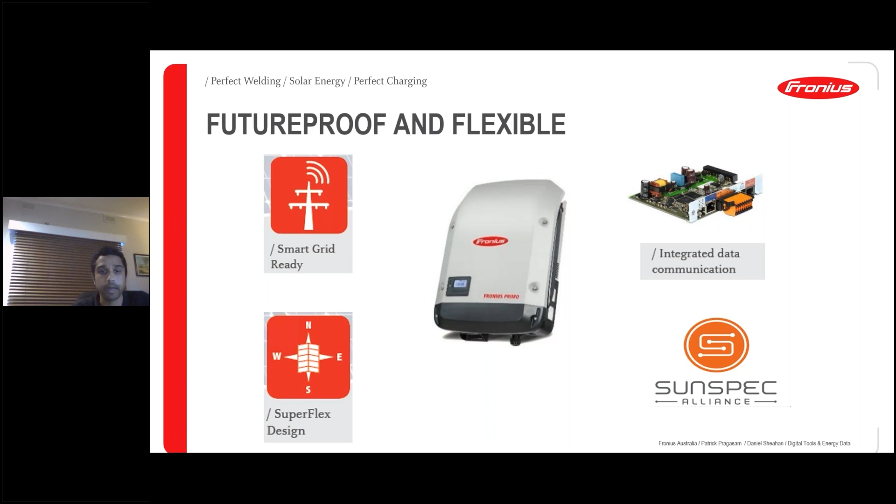So as I said, we have that vision of 24 hours of sun. And in order to accomplish that, we need to be collaborating. So this SunSpec Alliance, and having these open interfaces to make it easy to talk to other devices, that's also quite important. So looking at the data manager card 2, this is built into our inverters. It logs production data. It has various open interfaces to allow communication with other devices. Also, you can have a smart meter attached, which we'll go into in a little bit.

Sometimes people want to extract data to use with their own software. This can be done, for example, through our APIs. It's also able to do export limiting. There's quite a few sites out there that require that, so no need to get anything else. You've got that within this monitoring card. And then it also alerts you if something is amiss. If it's connected to the internet, you can get these alerts as well. All right. So there's a few different things there.

You're also able to do some energy management stuff that we'll touch on a bit later on. So, that leads us on to a question that we get: why monitor at all, right? So there's benefits to the customer if the system is monitored; then they can get more information about their energy profile at their premises. It can inform them about how to manage their energy, how to use their energy in the smartest way possible, right?

But also for installers, it's really important because it means that you can diagnose any problems. If, say, you get a call from a customer, you can see the system online and go through certain details, which we'll cover during this webinar as well. And with certain situations, you can even resolve things without having to go to site. And it's also easier to navigate conversations with certain customers.

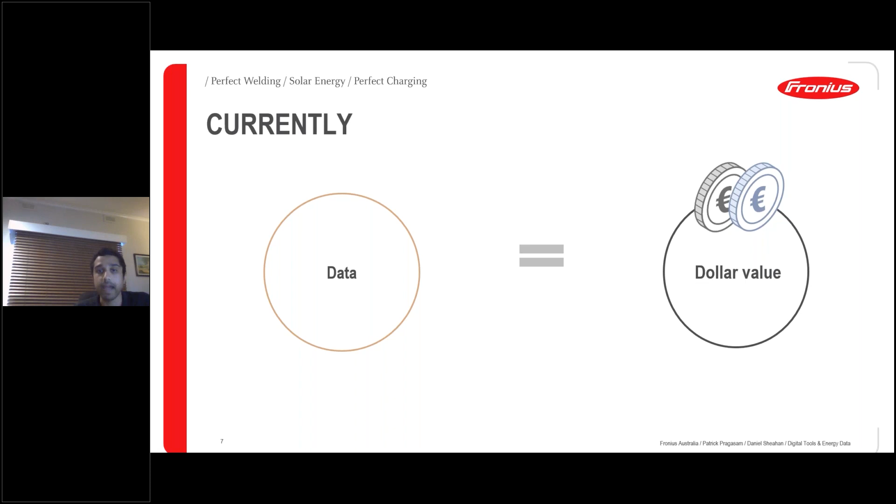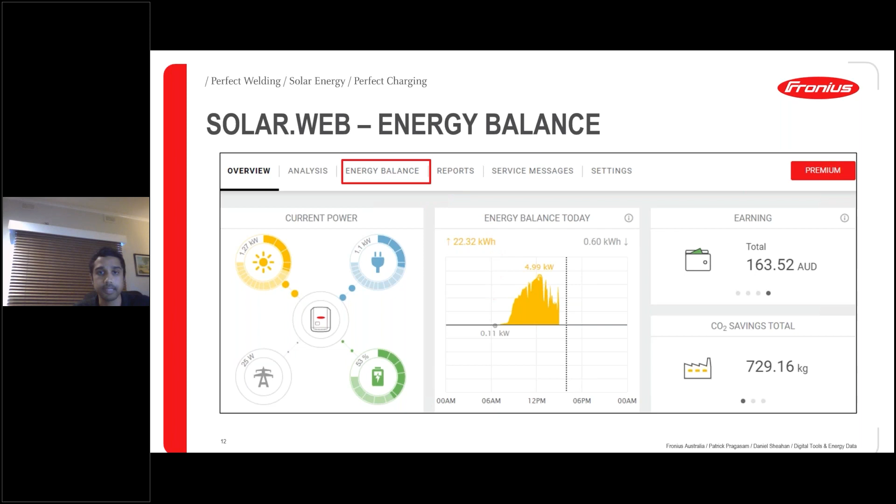Then if you go into the energy balance tab, so you can either click here or you can click on this graph as well, it'll take you in. And you'll get to this page here. So there's two different ways of viewing the data, right? Production and consumption. So I'll come to that in a second.

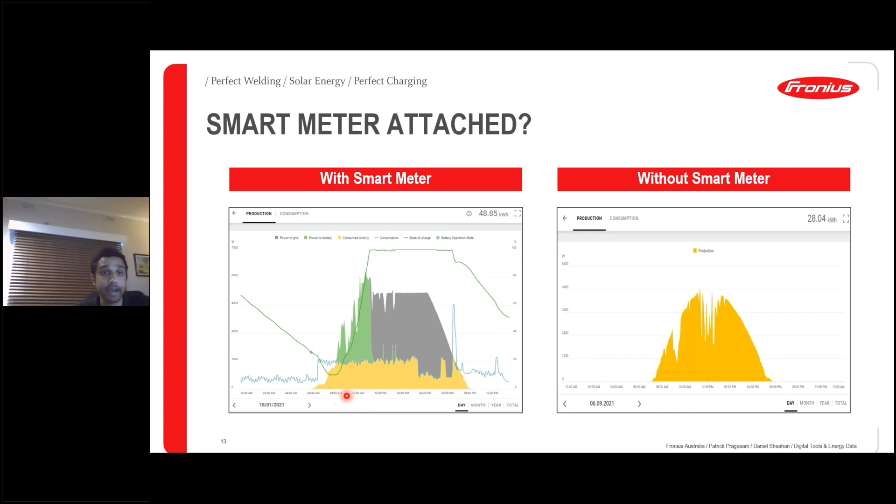But here, the difference that you can see right now with a smart meter versus without a smart meter, right? So without a smart meter, you can just see what's being produced. But with a smart meter, there's a lot more data that you can get. So you'll be getting 5-minute incremental data in the daily view. You also have monthly and yearly and total. But in the daily view, it'll look something like this, and you can get 5-minute incremental data, right?

So as I said, you've got the production view here, consumption view here. It's just two different ways of viewing the data. So you can see over here, power to grid is shaded in gray, power going to the battery in green. Your consumption is that blue line, and whatever is shaded yellow is what you're consuming directly from your solar system. So here, for example, this yellow bit is being taken from the solar system. The rest would be taken from the grid, for example. So quite a bit of data that you can see there. So that's the daily view.

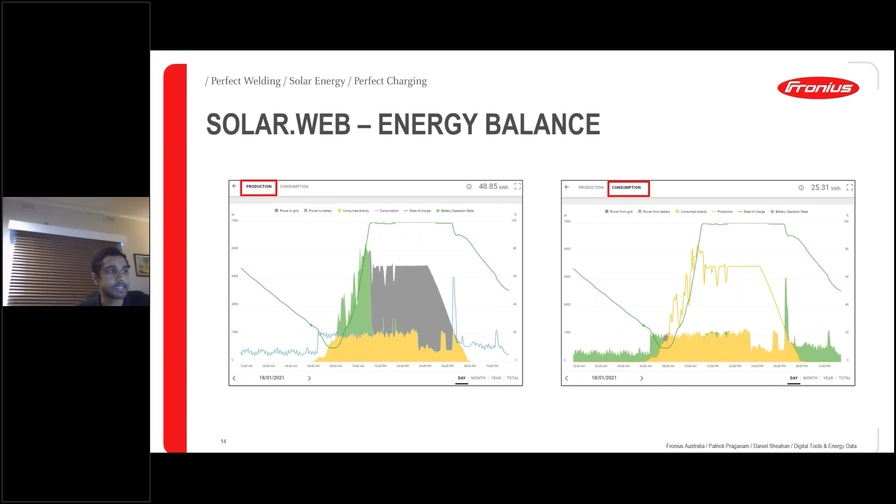And then you can also have the monthly view. So you get daily totals for each day. So you can see there energy to grid, energy to battery, and consumed directly, for example. So you're getting those totals for each day. And then if you click on the yearly view, you'll get totals for each month. So that's another way to visualize it. And then you can also click on the total tab here, which would give you totals for each year, if you want to see that.

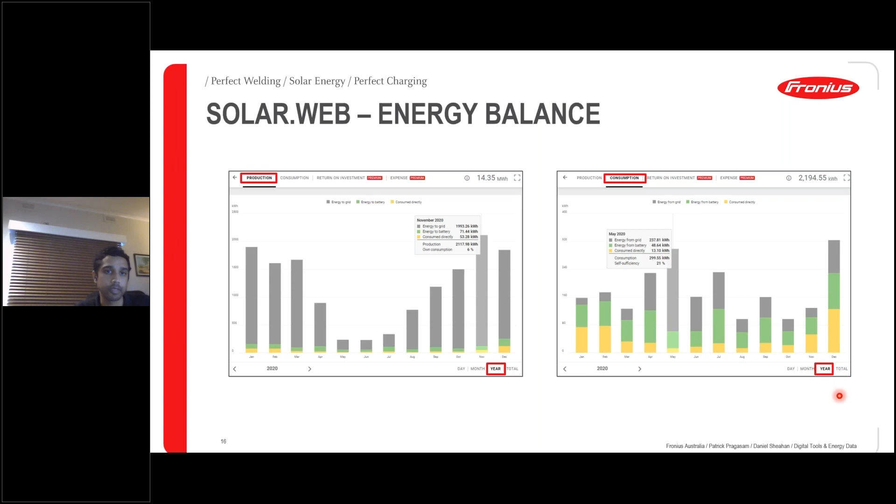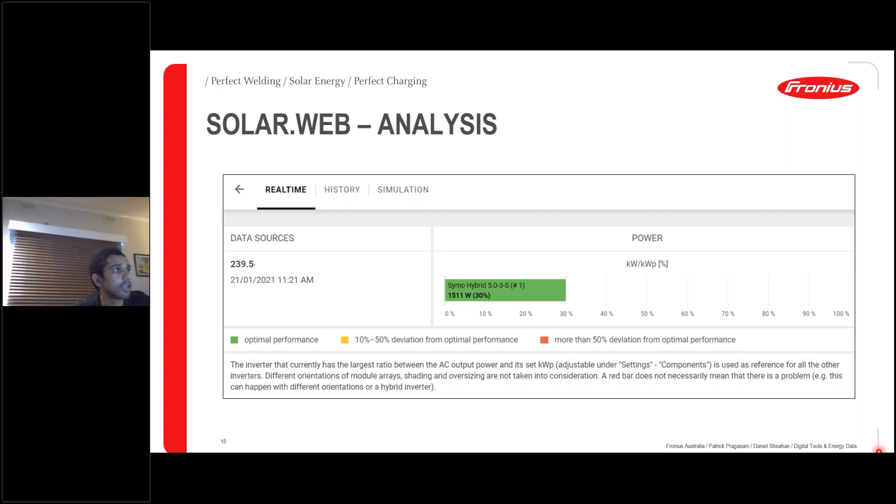Another way you can visualize data is to go into the analysis tab. So if you click up here, even more data can be viewed. So it'll take you through to this real-time tab. You can see how much your inverter is producing in real time, and what its performance is. And then if you click on history up the top here, you can choose your device. So you can either choose the meter, if you had a meter there, or you can choose your inverter. So I've chosen the inverter. And then you can select different parameters that you want to look at. So here we've got the current and voltage on the first phase there.

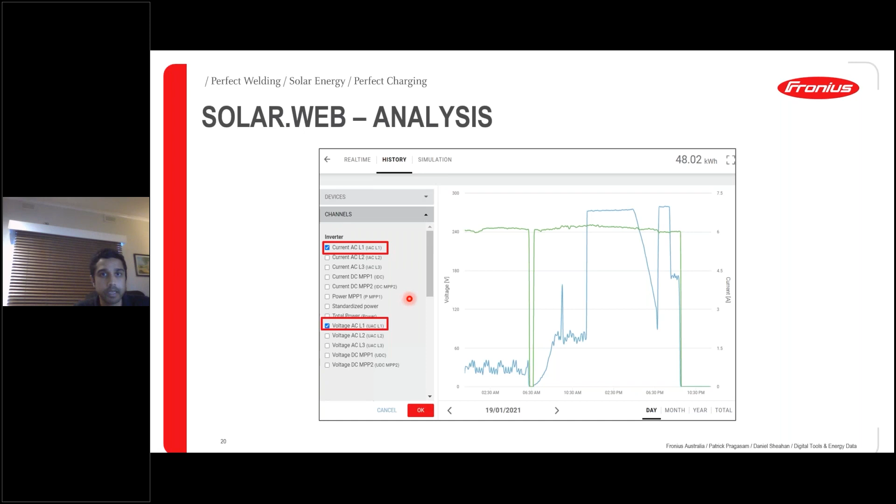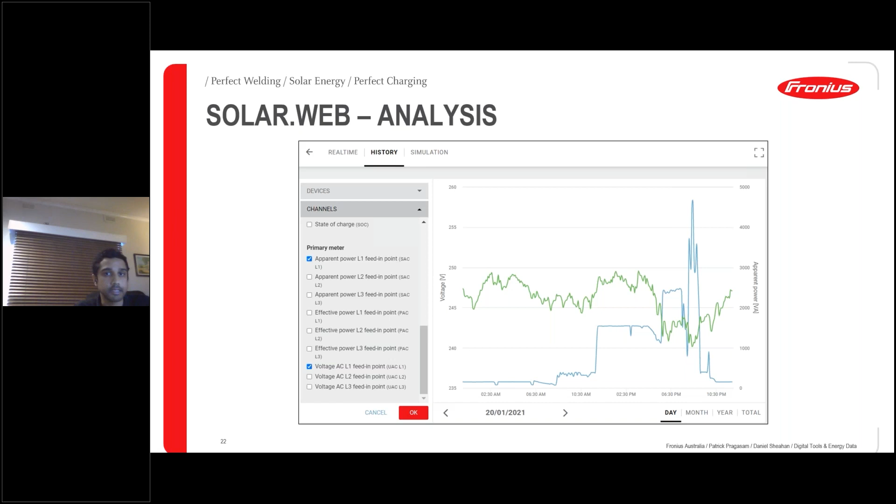And then if you also wanted to, you can look at things on the meter side. So you can select that and look at various data that the meter is seeing, okay? So quite a bit of data that you can visualize between the analysis and the energy balance sections within Solar.web. And another thing you can do is you can also extract this data into a report, if you need to do some further analysis on it. Or some installers will have to do certain reports for their clients, etc.

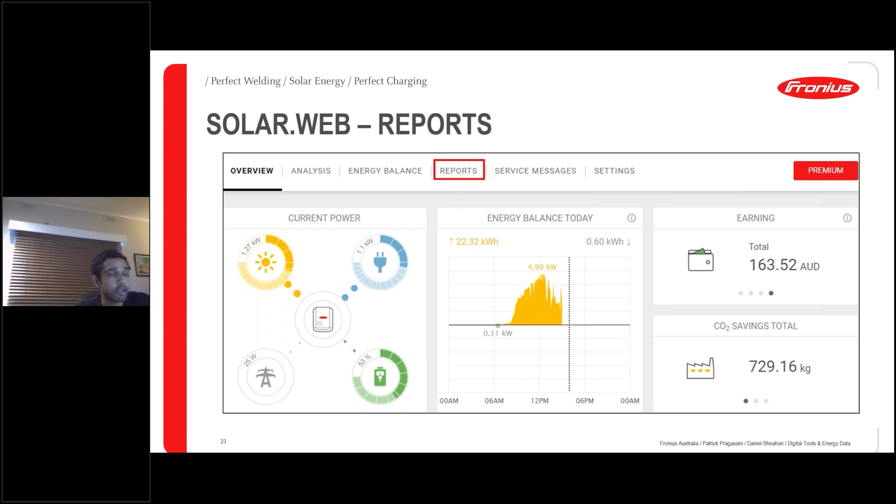So you can do this by clicking on reports, create a new report. And then if you don't have a smart meter, you wouldn't have that energy balance option. You could only do a report in PV production. And then you can also do some custom reports as well, where you can get a lot more parameters. So PV production is what's being produced. Energy balance will show you things like what you're consuming, what you're producing, etc. And then custom reports, you can have a variety of different parameters there. All right, so there's quite a lot of data that you can extract, and you can use this data to troubleshoot certain aspects when you're talking to customers.

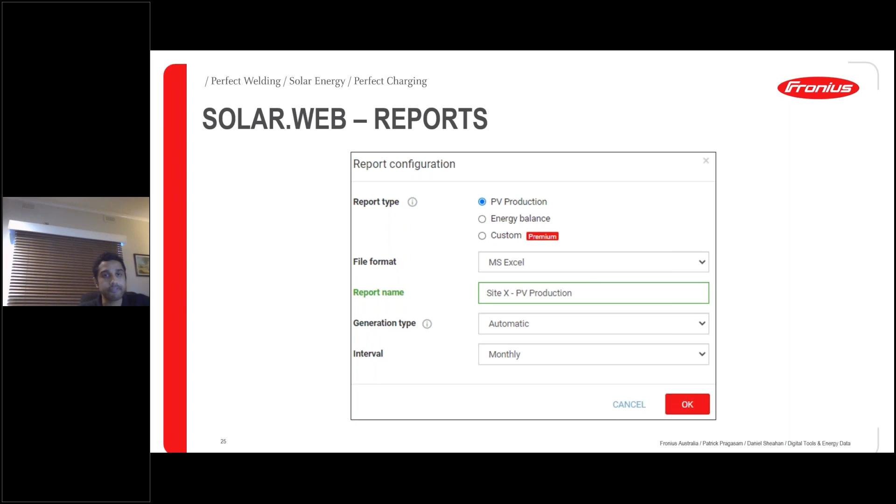But there's also different ways that you can use Solar.web to assess system health. So, is the system performing the way you expected? I alluded to the conversation at the start with the customer saying the bills aren't going down, etc. So seeing exactly what they're consuming and when they're doing it makes it easier to see if there's actually an issue. But there's also these other tools as well. So if you go into service messages right here, there's a log of all the service messages, state codes that appear on the inverter that you can look at.

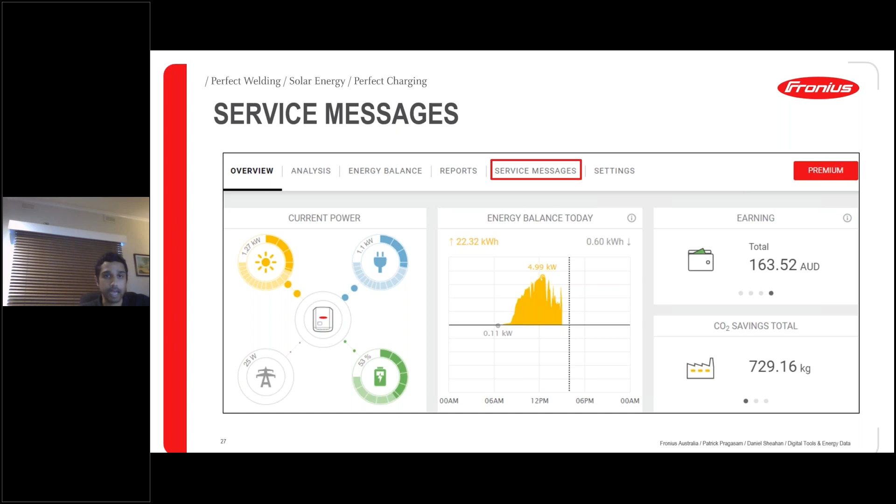So if you click on service messages, you can set a date range up there, and then you can see any service messages that have been received for that particular system, right?

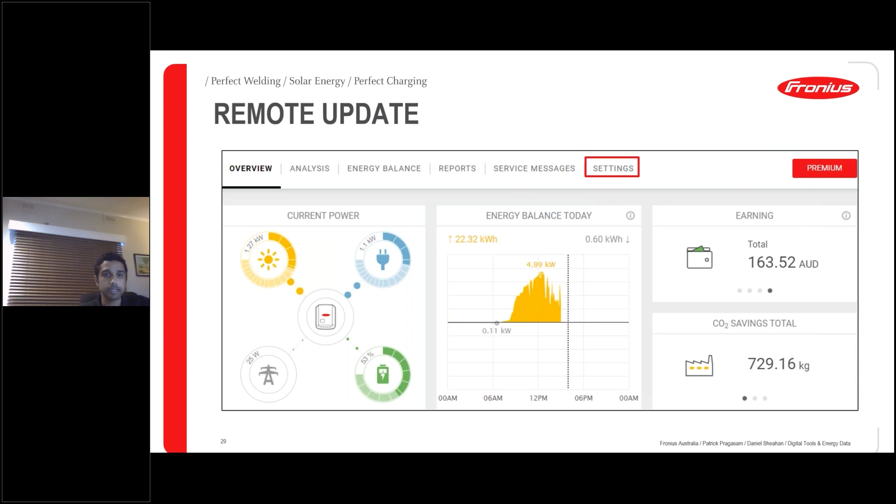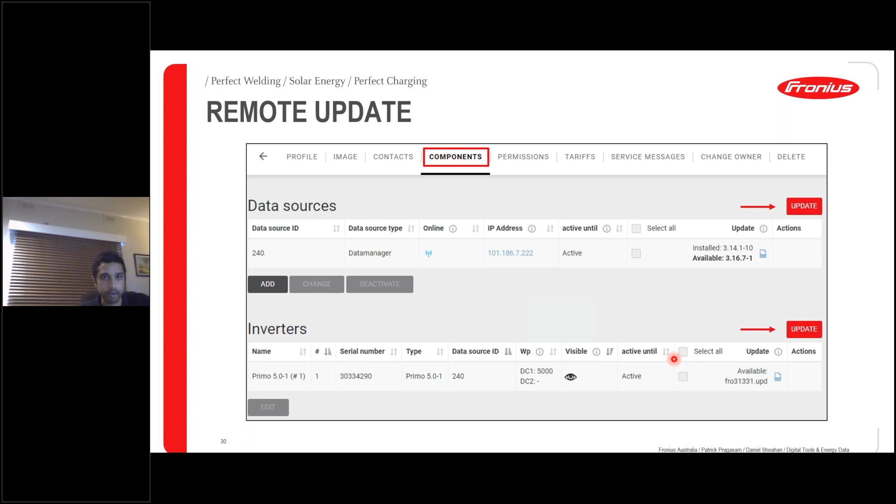Then you can also do remote updates. So if you go into settings, up the top there, and then go into components, you can see that you can update either the data manager card software, or you can also update the firmware on the inverter as well, right? So a lot of issues can be fixed this way, and it's something that can be done remotely, without having to go to site.

Then lastly, going back to that analysis tab, right? So in the history view, I told you before how you can get up various information for your inverter, also the smart meter as well. And this can also be used to troubleshoot and diagnose some problems there, right?

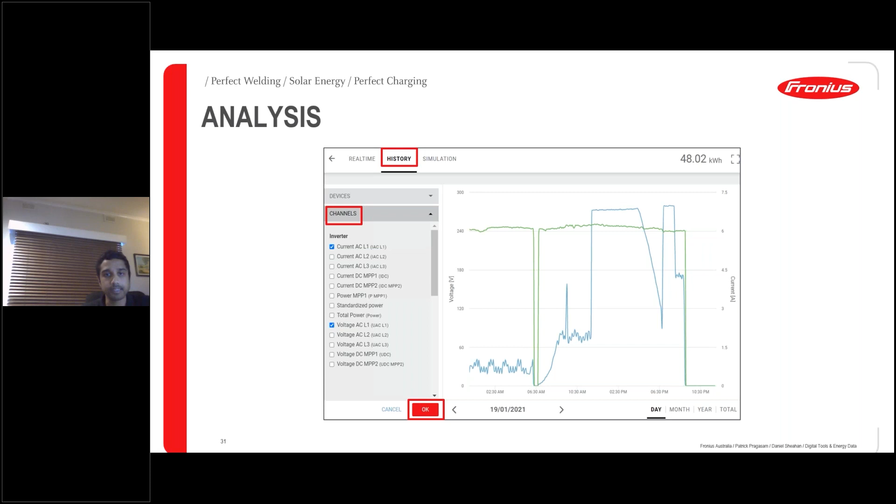There's certain examples like, if the inverter, say for example, was derating, you might go to site and then you might see that the AC voltage there was the cause of the issue, right? Or maybe the site was not producing enough, and then you can check the DC parameters, and in one case there was no DC current. So things like this, it can help with that preliminary troubleshooting and pinpointing towards possible causes of what's going on, right?

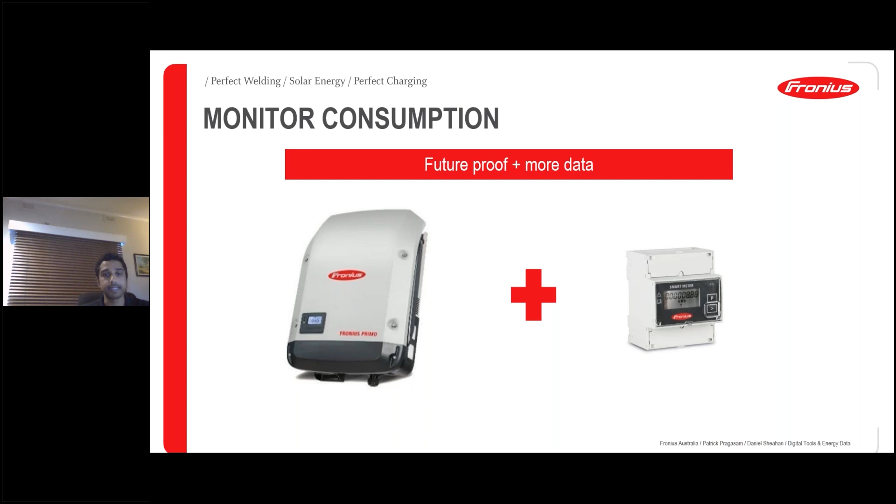So you have all this data that's available with Solar.web, right? And what that data can be useful for is future-proofing the system. So I was talking about data having this dollar value, and this relates to how the data can be used to future-proof a system. So as I was saying before, if you have a smart meter, then you're going to get more data, and with that additional data, you're better off for future-proofing the system, right?

So we always encourage customers to install a smart meter so that they can analyze their electrical consumption, so that they can be smart with their energy. With the smart meter attached, you get more in-depth information. Are they using a lot of power from the grid? When are they using their power, etc.? And when you have more knowledge about the system, you can define loads. And the advantage there is that you can start to do energy management. So you can divert excess power, say, for example, to a pool pump, things like that.

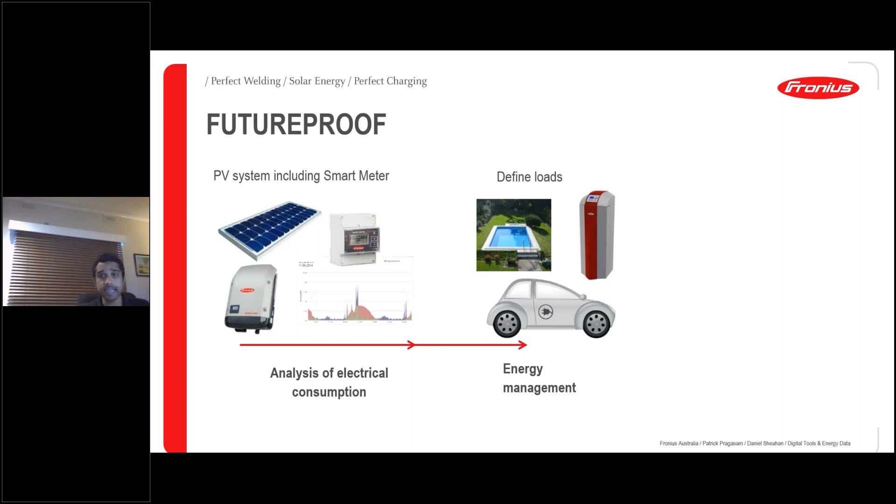And then if necessary, you can also store surplus energy if you think that that's the best way to go about it, right? So with the energy management function, customers can make decisions on the best way to manage their energy and whether they possibly need to expand their system. If they're thinking of getting an EV, for example, with this information, they can also do it efficiently in terms of charging, discharging, etc., and making the most out of their system. And then if they have to look at storage, this will better inform them as to how they go about that. We'll touch on that later on, right?

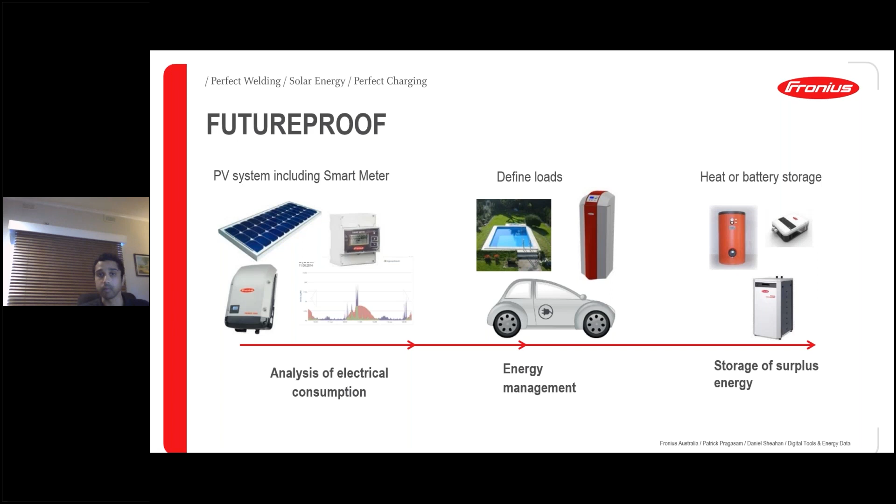So the more data that you have, the higher the dollar value, right? You can learn a lot about the system from having this data. You can also monitor individual loads if necessary with multiple smart meters to get a very detailed picture. When is this load kicking in? When are they using that load most of the time? But you can also get a lot of information just from one smart meter, to see what the overall load is on the site, right?

And it's important in the future when you think about getting a battery, for example, if that's really the step that you need to take at that point in time, right? So Dan will cover that a bit later on.

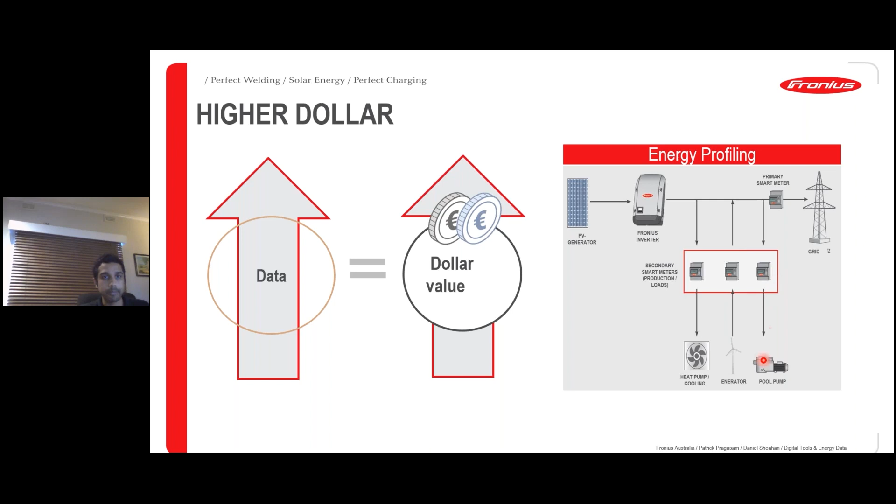So here you can see once you've got, sorry, my pointer wasn't working. Sorry, it's just jumped across.

Okay, so here you can see when you've got a smart meter attached, you can start to do things like optimizing the system with energy management and getting the customer to make the most of what they have, right? So you can go back to the customer and say, hey, I can see that you're using a lot of power at this point of the day consistently. Do you know what's turning on? It might be a pool pump or a hot water system.

And then, depending on the circumstances, you can upgrade the system by installing a contactor, which can be used to control the load, switch it on or off using our free energy management software, right?

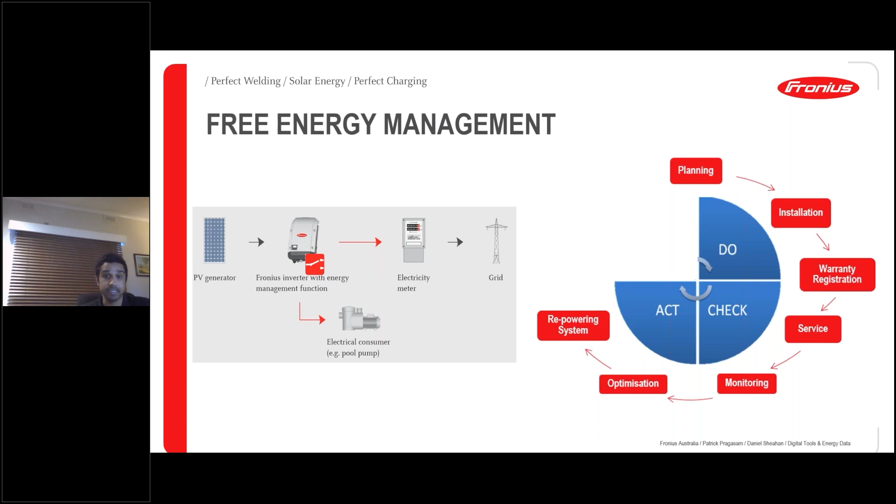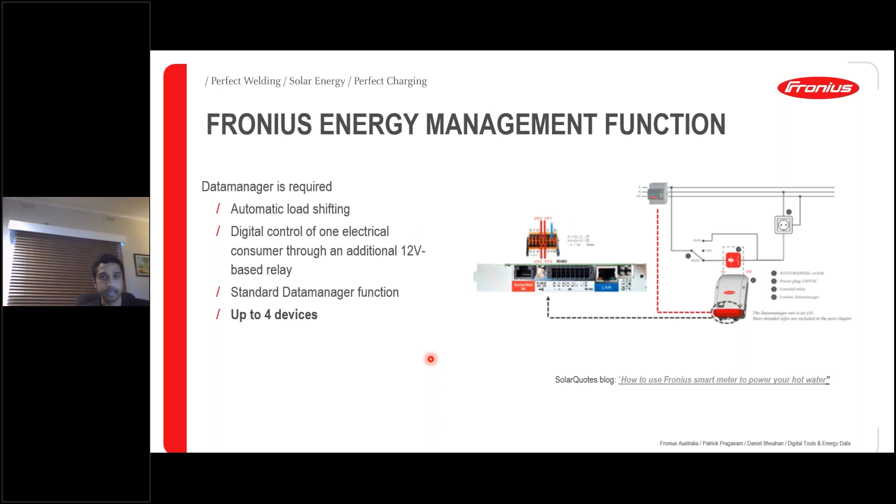So how do we go about that? If you have, say, a smart meter, it can tell you how much power you are exporting to the grid, how much excess power you have. And then you can control up to 4 devices or 4 different loads via 4 different contactors. These can switch on or off depending on what parameters you set. It's just a 12-volt signal that gets sent to turn them on or off.

The thing here is to make the most of what you have, increase that self-consumption. Some installers will already know, from the conversations they've had with the customer, how they're using their power. So they might set 1 or 2 of these contactors up when they install the system to divert that excess power. But otherwise, you can monitor the system for a bit and then come back to that customer.

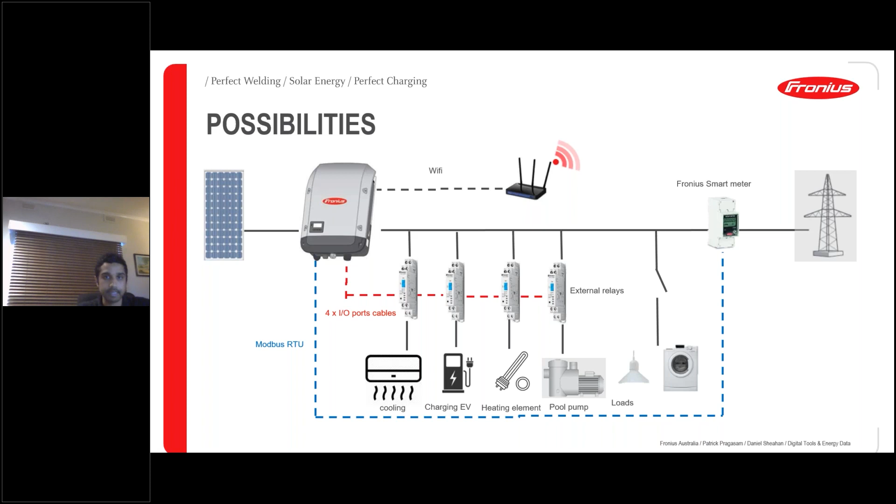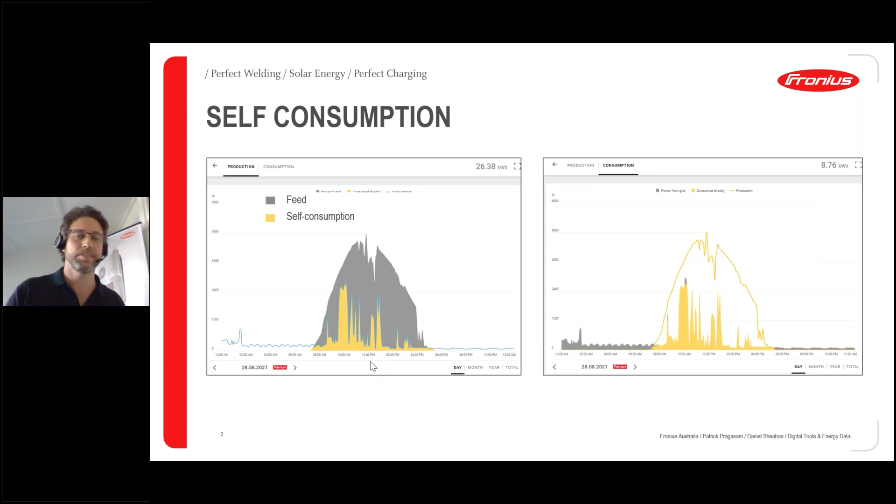So just to cover a bit more on self-consumption, I'll just show another of those slides that Pat had from Solar.web. This is the example of where you're looking at your consumption during the day. And the difference with self-sufficiency is when you start to look at your nighttime usage. A lot of customers, when they see that during the day they've got a lot of excess PV power, want to be able to utilize this as well, rather than just send it back to the grid.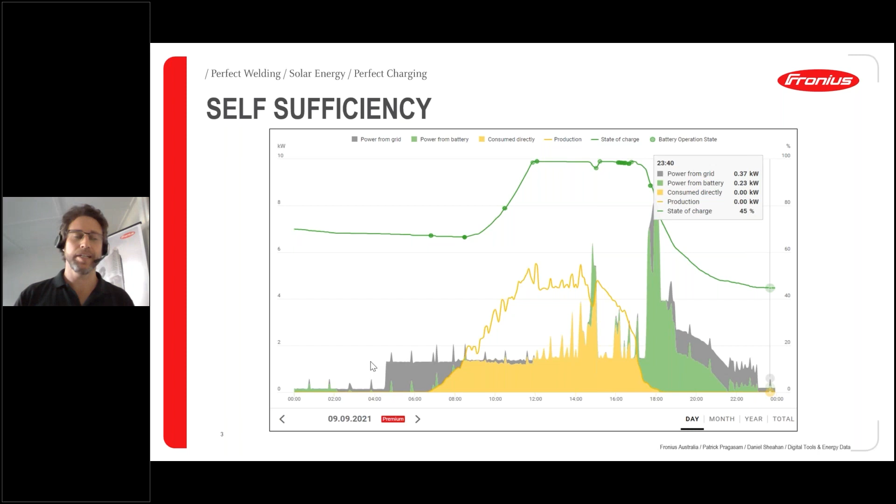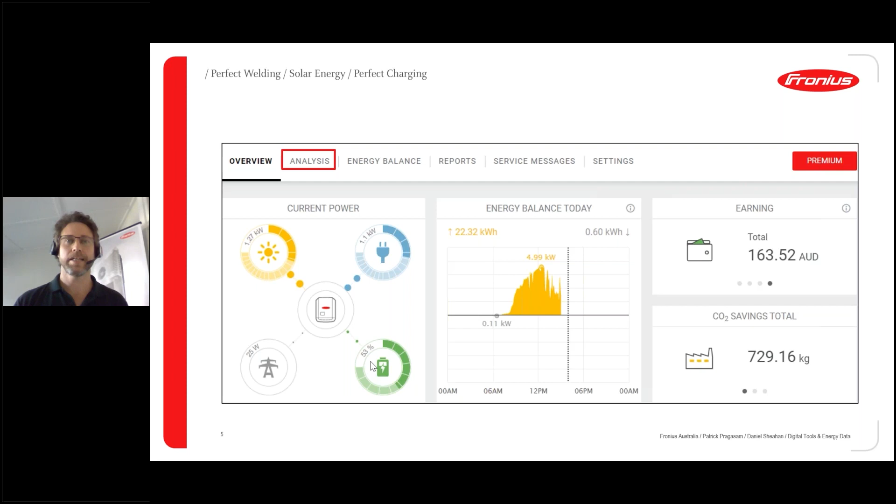So that's when, obviously, it's a big topic, batteries and energy storage. How do we utilize this, and what's the best way to do it? Customers will want to know what's the best size battery for them. Another great tool we've got in Solar.web is the simulation tool. You simply click on the analysis tab within Solar.web, and that'll take you through to a page where you'll see the simulation tab on the right hand side. If you click on this, then you're in the simulation tool.

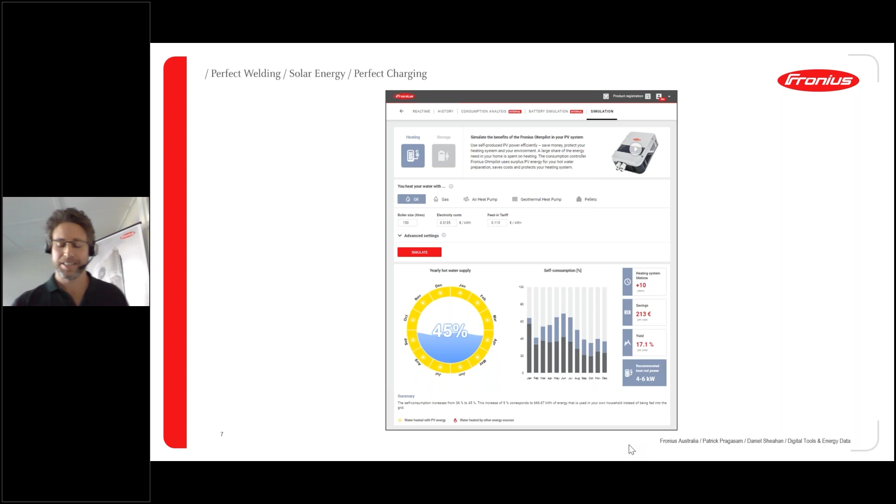In the simulation tool, this will enable you to select heating or storage. The heating section is there just for the Fronius Ohmpilot. It shows you what you can get out of just adding the Ohmpilot and using that for your excess PV power during the day. But most people are interested in the storage function. If you click on storage in the Simulate tool, it then takes you to this page.

On the left there, you've got the self-sufficiency graphs. When you select a battery and click on Simulate, this does a calculation based on the customer's PV production and also their consumption. So you do need a smart meter to be able to use this function. For any of your customers who have had a Fronius system with a smart meter installed for a while, you'll be able to utilize this Simulate tool with them.

All you simply do is click on a battery, and this has all the different BYD battery types that are compatible with the Fronius Gen24s. Once you select a battery and hit the Simulate button, it does the calculation in the background and tells you the self-sufficiency rate.

And this will enable you to propose to your customer the best size system that they need for their battery. The screen on the right is exactly the same as the one on the left. It's the same battery, the BYD 6.4 kilowatt hour battery, but what they've selected there is the backup mode option. This is leaving some reserve in the energy storage in the event of a grid failure. So if you have a blackout, you have that reserve power there left in the battery.

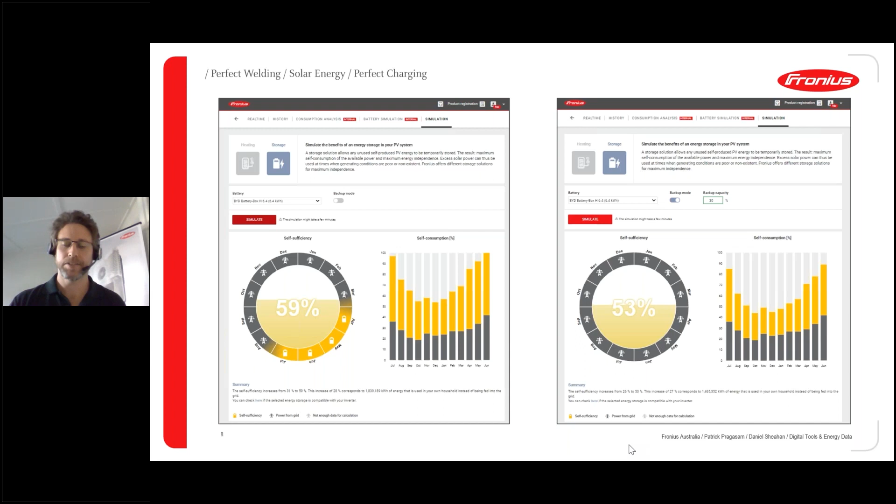What this will do is make sure that they've got some power when the grid goes down, but it does reduce the self-sufficiency rate a little bit, because obviously you're not able to use that battery storage as it's kept in reserve. But you might think that by just clicking on the biggest battery, this is going to give you the best self-sufficiency rate. Well, that's not necessarily true.

As you can quickly figure out, if you don't have enough solar PV, you're not going to be able to charge that battery. So by selecting different battery types in the Simulate tool and trying a few different types, you'll see that self-sufficiency rate change, and you'll get to the point where you keep selecting bigger batteries, but the rate doesn't increase. This is because you've hit the limit of where their PV power is able to charge that battery.

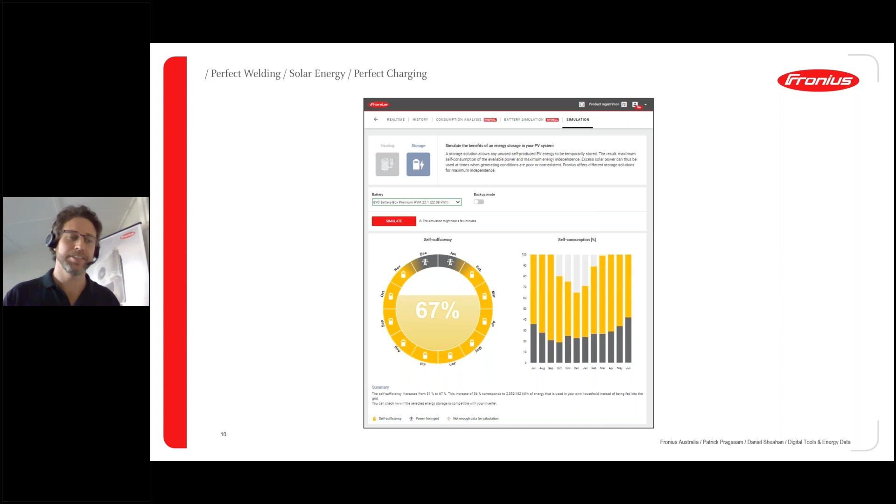So when you get to this stage, you've got two options: you can either recommend they stay with the smaller battery size, or it also might give you an opportunity for some repeat business to tell the customer that they need some more solar power if they want to increase that self-sufficiency rate even more and be even more independent from the grid.

So once you've had this conversation with your customer and you've put the proposals to them, then you can start talking about Fronius's Gen 24 product, which is our great hybrid battery storage unit. A lot of you have probably all seen this inverter. It's been around for a little while. This is now the new flagship hybrid battery energy storage product. It's the all-in-one unit from Fronius.

So I was just going to go through some of the info and specs on the Gen 24 for those of you who might be a bit new to it, as this is the flagship product for Fronius for energy storage. All right, so we've stuck with the names in the Gen 24 unit of Symo and Primo, with Symo being the three-phase unit and PRIMO being the single-phase unit.

In the Symo range, the 6 to 10 kilowatt models are going to be the most popular in the three-phase range. And in the PRIMOs, at the moment, we've got the 3 to 6 kilowatt models. All Gen 24 Plus units are compatible with BYD batteries, so there's the HVS range and the HVM range for BYD.

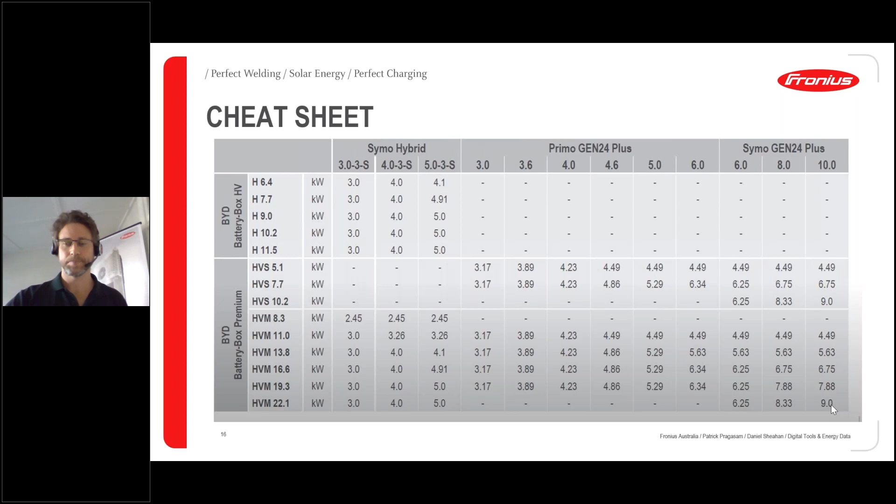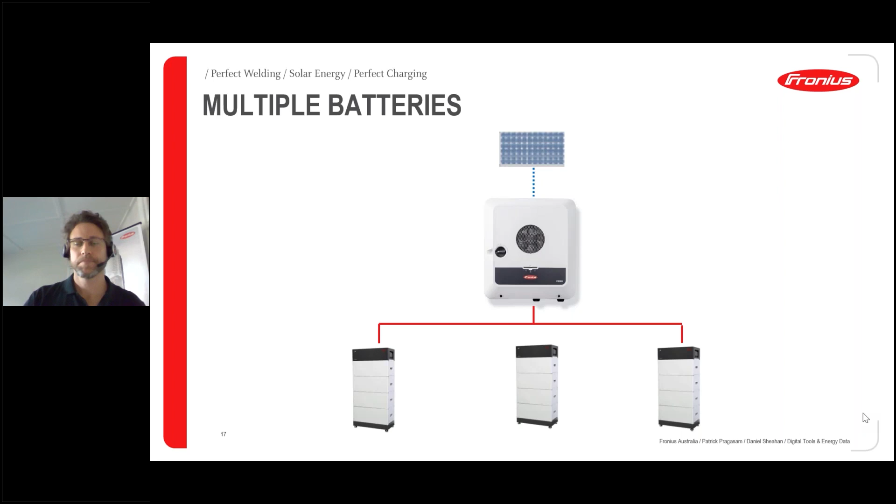Yeah, and as I mentioned, you're able to actually put 3 stacks of the BYD batteries onto one Gen 24 to increase your energy storage even further if the customer decides they need more energy storage. So you've got lots of options there, and this is showing that when you go to 2 or 3 stacks, you can really have a lot of energy storage with the BYD batteries.

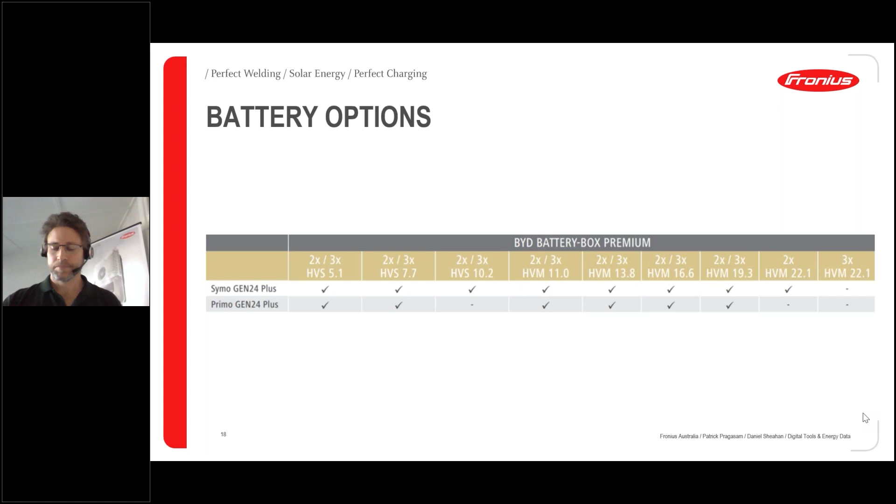All right, so when Fronius developed the Gen 24, they developed it with high efficiency in mind. They wanted to get the most efficiency out of those batteries when supplying the loads. And so they came up with this multi-flow technology, which simply means that it's a DC coupled style of charging to the battery straight from the PV array. And it can also supply the loads at the same time as charging the battery.

So if the grid goes down, you're still able to charge the batteries from the PV array, and you're able to supply the loads as well. That's in the full backup mode. I'll go into that in a bit as well.

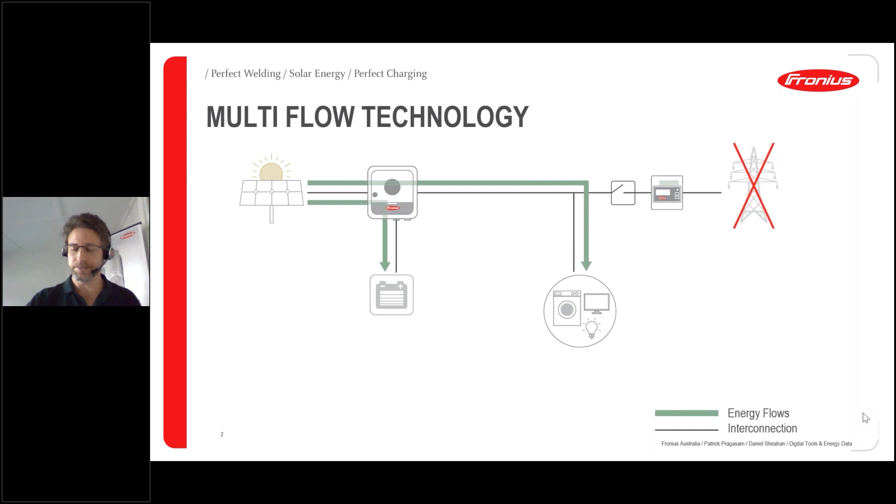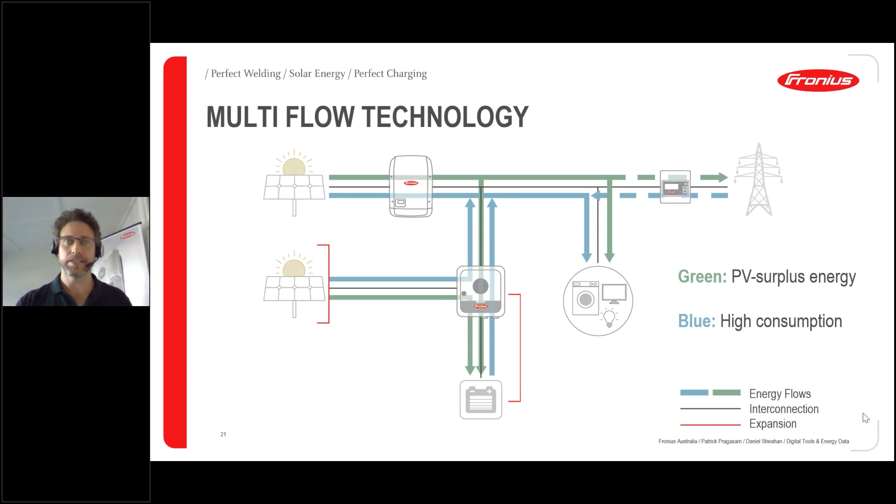So with the multi-flow technology, if you've got a customer with an existing Fronius inverter or even some other brand of inverter, you're able to add on the Gen 24. It can be AC coupled as well. So it'll utilize that excess AC power to charge the battery. And this can be done without even putting PV on the Gen 24. But if you put the PV on the Gen 24, you're going to get that advantage of having the high efficiency in charging with a DC coupled style in the multi-flow technology.

So because Fronius has developed the Gen 24 with high efficiency in mind, they've done really well in some independent testing. So this graph here is from testing done by HTW Berlin University over in Germany. They test a number of hybrid systems every year. And as you can see in 2020, the Symo Gen 24 came out as the most efficient system tested. And this is the overall efficiency or round trip efficiency, how much losses you have to charge the battery and then supply loads from the battery.

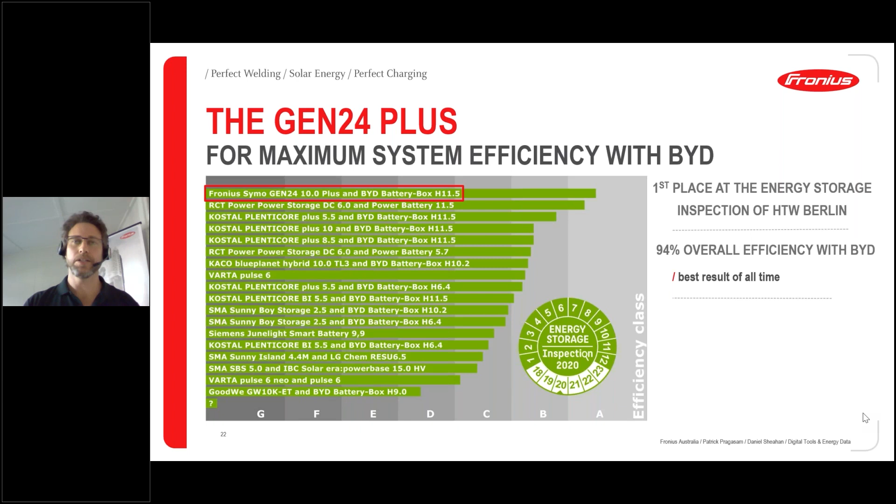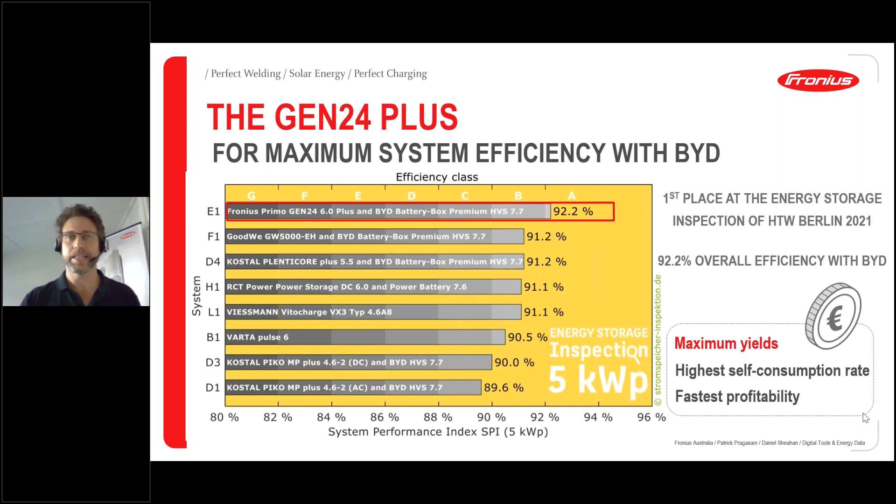And then also there was some more testing done this year with the Primo Gen 24 being the single phase. It's not quite as efficient as a 3-phase, but it's still up at 92.2%, and the most efficient system they tested out of all those other hybrid systems tested, you can see in the graph. And having this high efficiency is going to mean you're going to get more yields for your customer, and they're going to get a better return on investment from their battery storage.

All right, so another great feature of Gen 24 is you've got 2 options for backup power. Most people, when they talk about adding batteries, they really want to have backup power as an option on that system. So Fronius has come up with a great inexpensive backup power option where you don't even need to have a battery to get some backup power. And this is going to be a great feature of the Gen 24s because it's a very inexpensive option in giving the customer a little bit of energy independence. If the grid goes down, they're still able to get a bit of power out of their inverter.

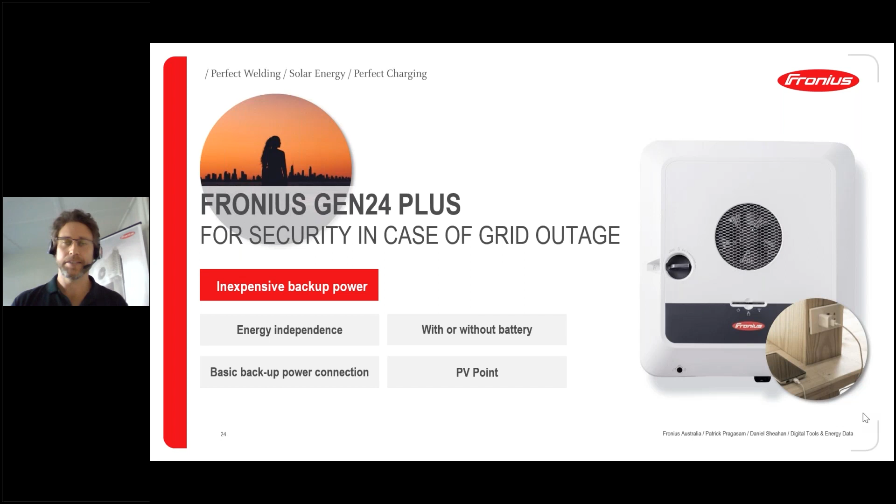So this basic backup power option we're calling PV Point. And the way it works is you simply have a secondary AC output inside the Gen 24, and this AC output would be wired directly to a power point next to the inverter, and the customer is able to get some power. So the power they can get out of it is obviously going to be dependent on how much the sun is shining and how much solar PV power there is if they don't have a battery. But with this backup connection, it does automatically switch over when the grid goes out.

So with PV Point, it's not active when there is grid mains power. So it only automatically connects when the grid shuts down. When you lose mains power, it takes about 45 to 60 seconds to change over, and it will power up as long as the sun's shining on the PV array. So it'll supply up to 3 kilowatts single phase only, even with the Symo Gen 24s. PV Point is a single phase power point. So this gives the customer a really inexpensive option for a bit of backup power, as it's a pretty straightforward install.

The other option you've got, I'll just go through this graph showing you how it works with PV Point. When the grid goes down, if you've got the sun shining, you're still able to get a bit of power out of your solar panels, and after about 45 seconds, it'll change over and supply power through to PV Point. And it can work with the battery as well. So you can use PV Point with the battery, and this is obviously going to mean it's a more reliable power source, being able to use the energy storage as well. There you have it. That's the PV Point option for backup power.

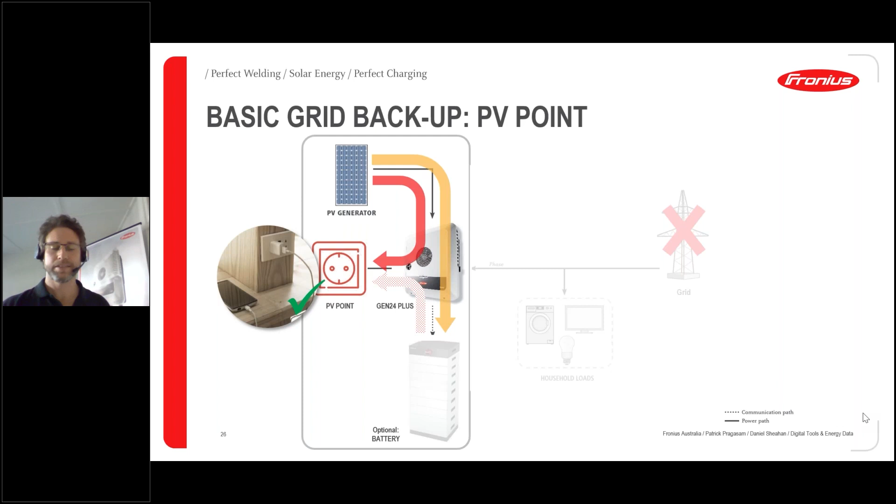The second option you've got is to go to a full backup power option. In the event of grid failure, you can have maximum backup power where you back up certain circuits in the house, or you could potentially even back up the whole house, depending on what the loads are within that house and what size system they have. But it would be possible to back up the entire house because the relay, the contactor, is external from the Gen 24. So you can select like a 63 amp contactor so that it's able to switch over the whole house.

So the way this works, when the grid goes down, your backup switch is going to disconnect the Gen 24 from the grid. So you can go into island mode, and it's going to supply power from your PV array. You can still charge the battery and supply the loads at the same time that are connected on those essential circuits. So this is your second option for backup power with the Gen 24.

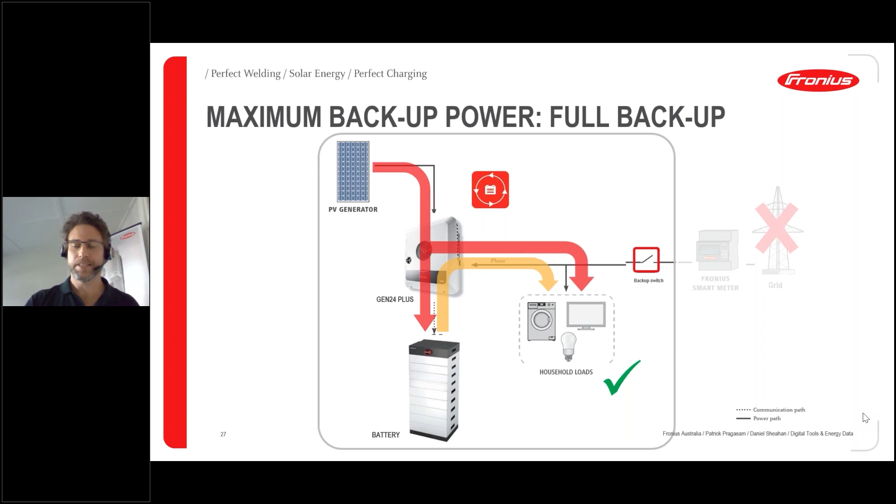All right, so just getting back into Gen 24 and the digital tools that you have with Gen 24 and through utilizing Solar.web as well. It's got some open interfaces on it, like the SnapINverters. It's able to be easily integrated into third-party devices, such as home automation systems or perhaps an EV charging station that a customer has. You'll be able to utilize the open interfaces on Gen 24 so you can increase the customer's self-use.

The standard interfaces that Gen 24 has are obviously your Wi-Fi and Ethernet connections. And then you've also got 2 Modbus connections on the Gen 24, whereas the SnapINverters only had the 1 Modbus circuit. The Gen 24s have 2. And you've also got the digital inputs and outputs for the Gen 24, the same as the SnapINverters. And this can be used for all the energy management functions that Patrick was talking about, where you're able to prioritize loads and switch on and off some relays so you can really maximize that self-consumption.

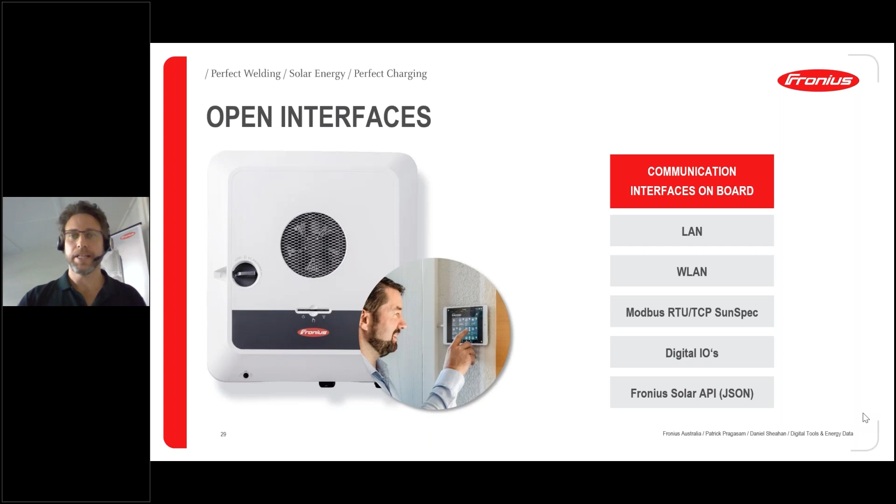And there's also the option of the Fronius Solar API, which is where you can start to integrate with third-party devices like a home automation system. And that's another way to maximize your self-use. Yeah, and as we've been talking about a lot, there's the great energy management function on the Gen 24 as well as the SnapINverters.

All right, so you've got the top system monitoring of Solar.web, where you're able to utilize all the data you're getting out of the inverter, especially if you install a smart meter. As we move towards an energy storage industry, we highly recommend that all Gen 24s go in with the smart meter to future-proof your system. It's really going to help you to maybe get that repeat business with the customer. And the Gen 24 is designed as a hybrid inverter. So you really want to be putting in that smart meter to utilize all the functions you can get out of it.

Okay, guys, well, that's just about it for covering some of the functions and features of the Gen 24. Yes, it's a new product. It's the flagship from Fronius. That's going to be the all-in-one solution for energy storage systems in the future.